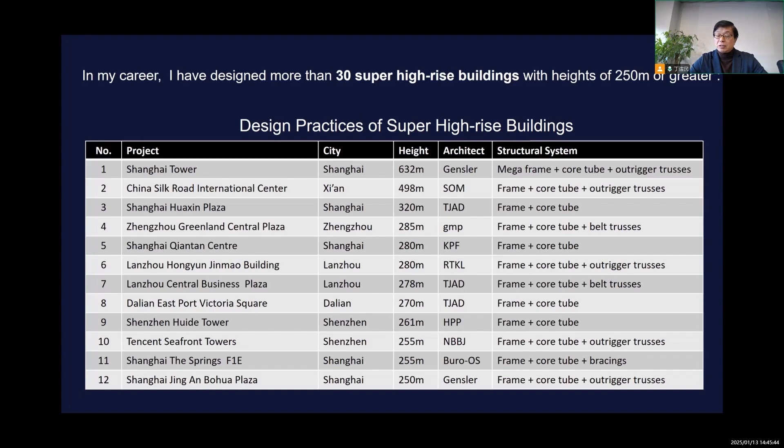Now I will introduce some building designs, first the practice in super high-rise building and large span building structures. This is a very famous building, now the highest building in China, Shanghai Tower. We got a lot of consultants together to work and design.

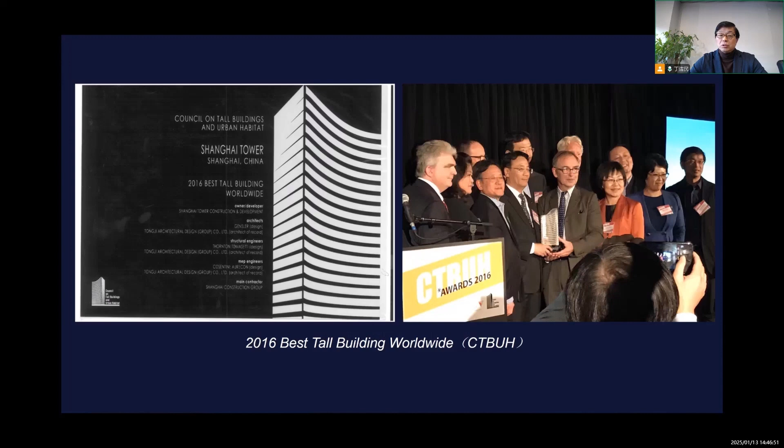The building got a lot of awards from abroad and in China. This picture shows the 2016 Best Tall Building Worldwide award which we received. Also in 2018, I got the Outstanding Structure Award from IABSE. This picture shows we got the 2019 Shanghai Science and Technology Progress Award, and the 2023 National Science and Technology Progress Award.

This is another super high-rise building located in Xi'an City. The height is near 500 meters. We worked together with SOM. This is a simple introduction to the structure system used for super high-rise buildings.

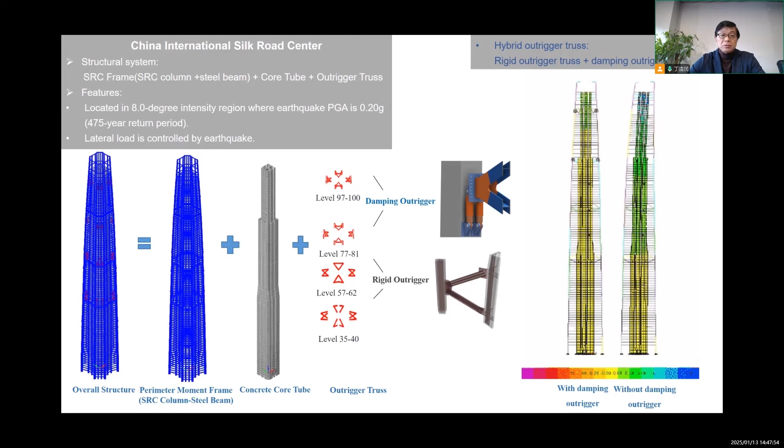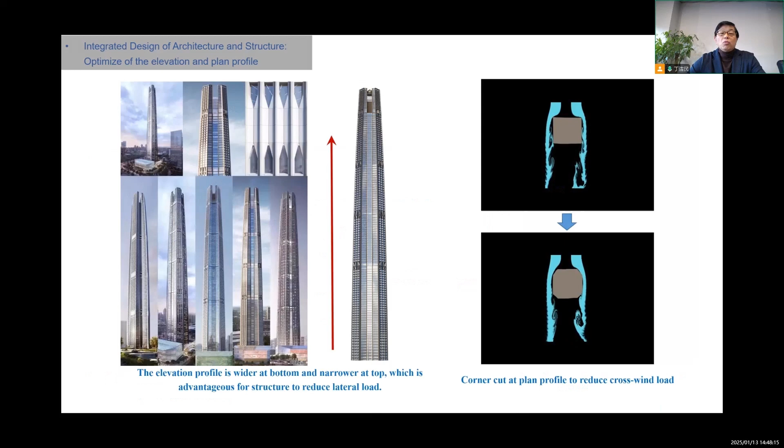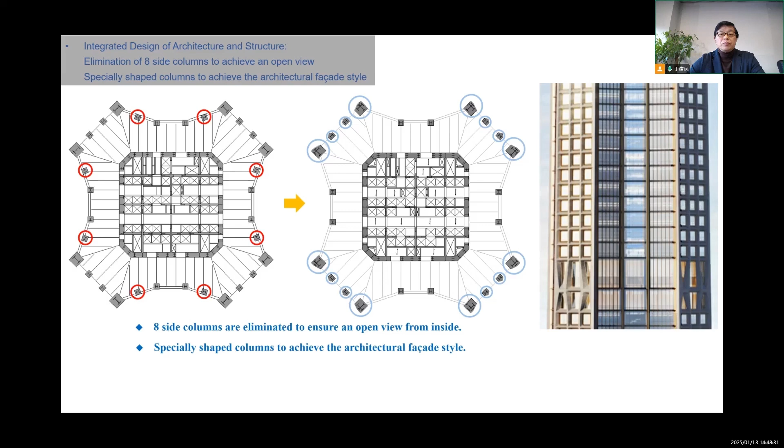This PPT shows the integrated design of architecture and structure, optimizing the elevation and plan profile. This optimization reduces wind load influence. This figure shows how we optimized to reduce the column numbers and make the structure design more easy and more beautiful.

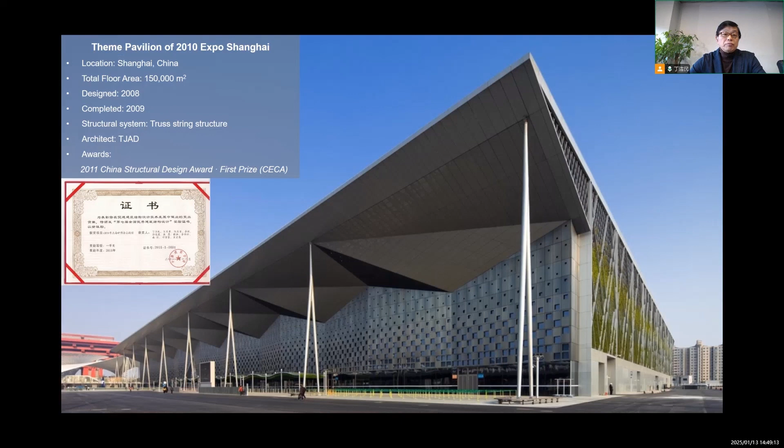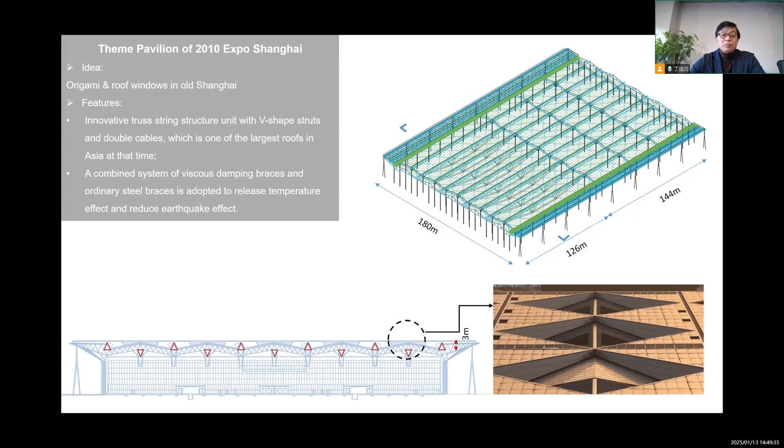This is a very interesting large span building located in Shanghai in 2009. This is the roof shape, and this is the structural system used for this building. At that time, this building had the largest span in Shanghai. This picture shows the interior of the building.

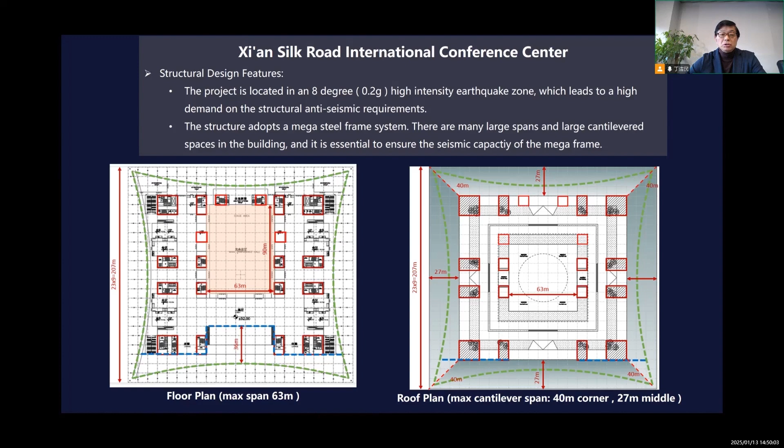Another building located in Xi'an City: this is the Silk Road International Conference Center. This picture briefly shows the roof plan in the building, in terms of architecture and structure.

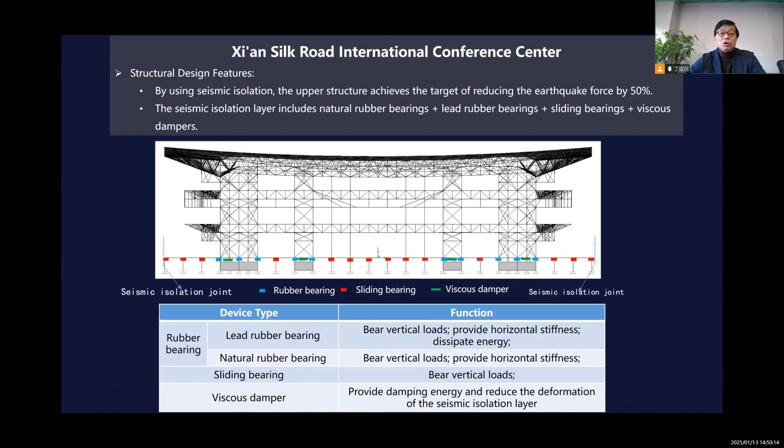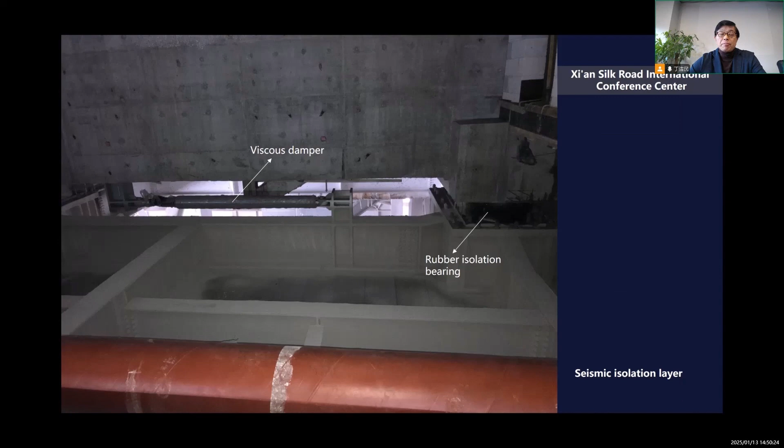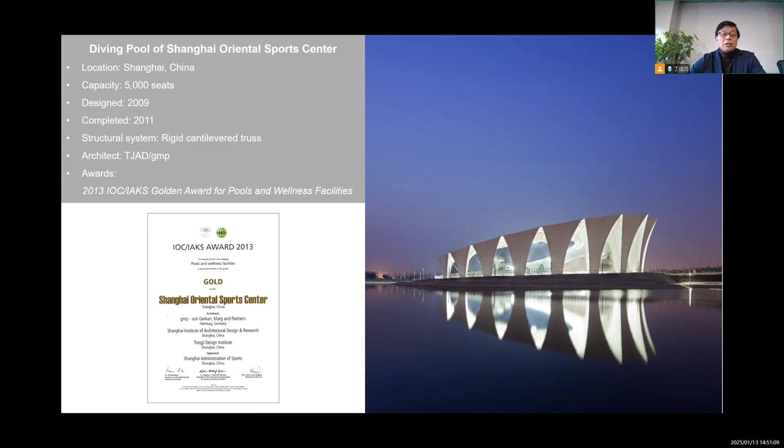This is a building located in Shanghai, the diving pool of the Shanghai Oriental Sports Center. We worked with GMP, the German architects. This building got a lot of honors and also looks very beautiful.

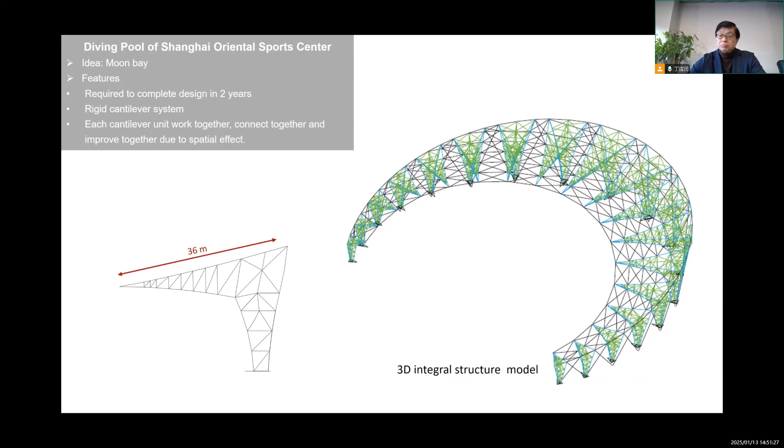This is the structure system shown and used for these buildings. After construction, we can see that the building looks very clear, very simple, and very comfortable for the architecture. This is another picture which looks very nice.

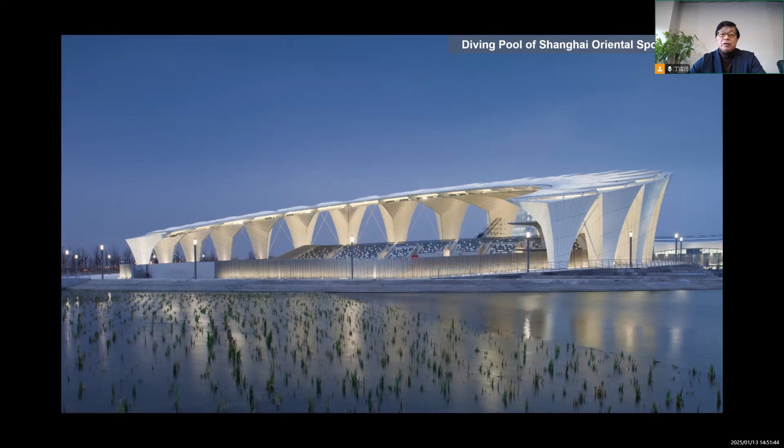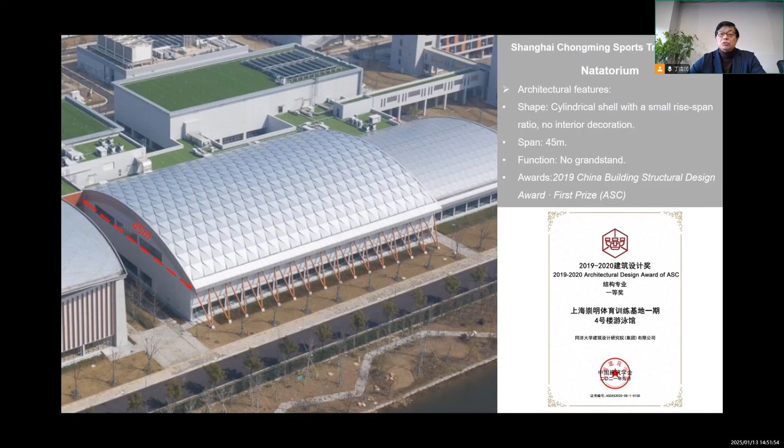This is also a sports building located in Shanghai, a swimming pool. It also got a lot of awards in China. This is the structure used for these buildings.

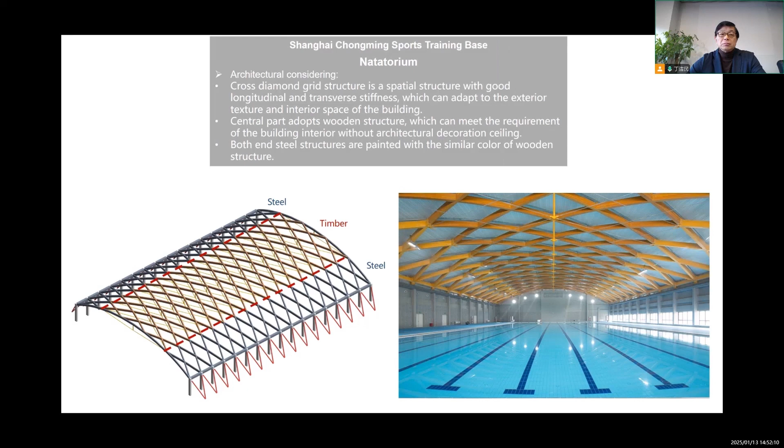Wood material was used for this building. These show some details of the roof structure, and some detail about the joint.

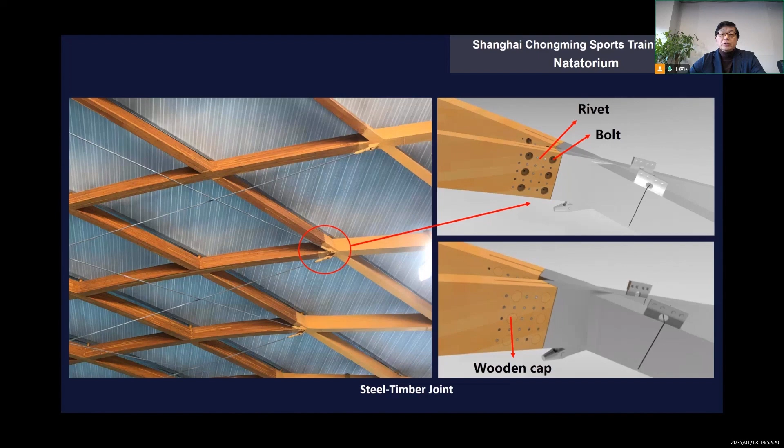After construction, we got some interior views of the buildings. This is another sports building for bicycle racing, and we can see that the building looks very nice.

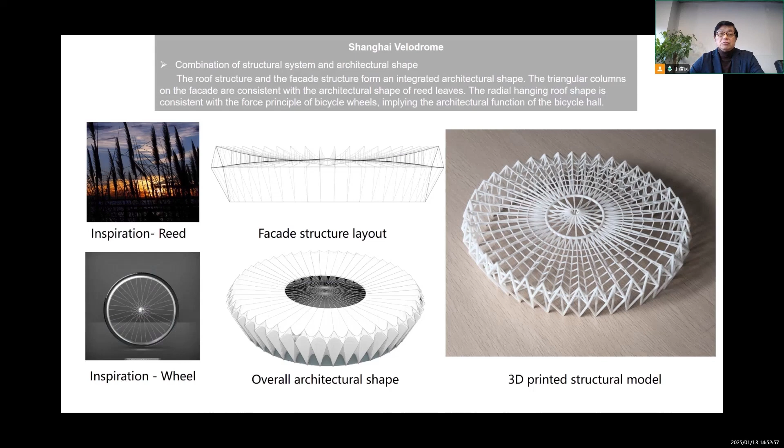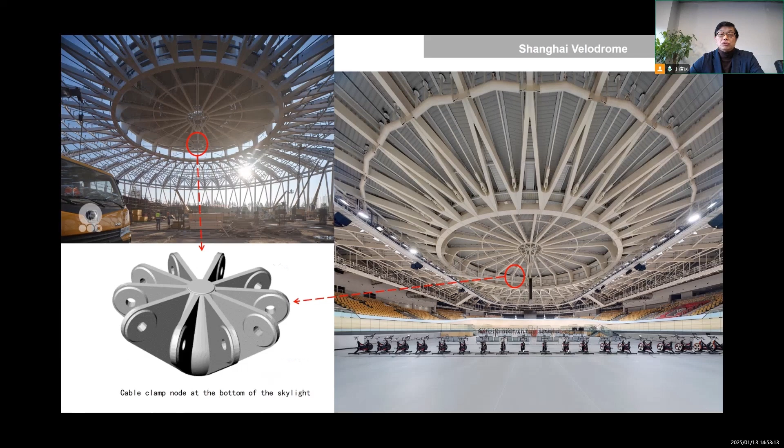This is a structure model, a 3D printed structure model, very comprehensive with the architecture. This building shows the structure construction. This roof picture shows after construction, and some detail. This is the elevation of the architecture.

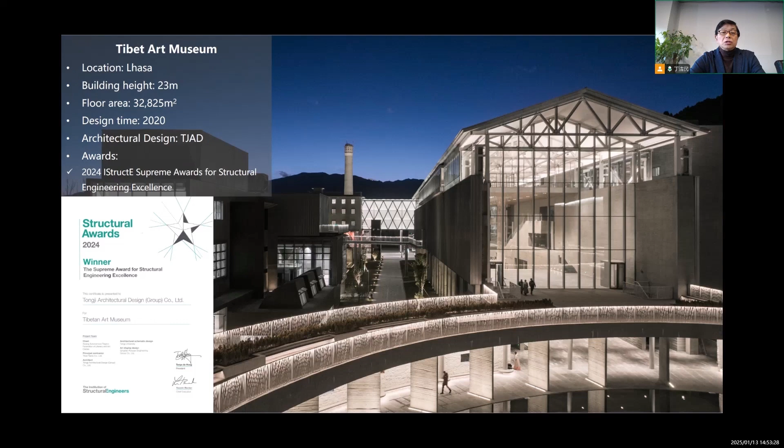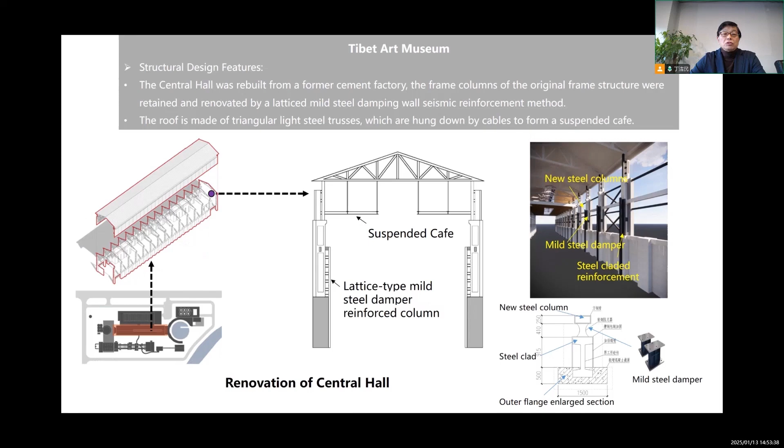Now we can introduce the Tibetan Art Museum. That project just got the structure award last year. This PPT shows some structure design features and some new technology used for this practice.

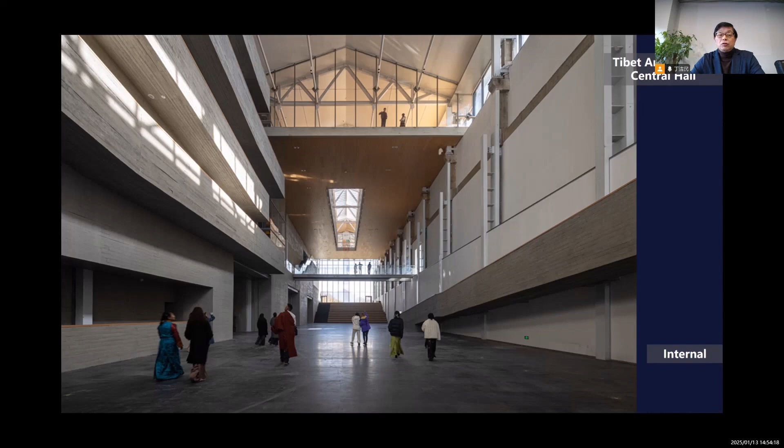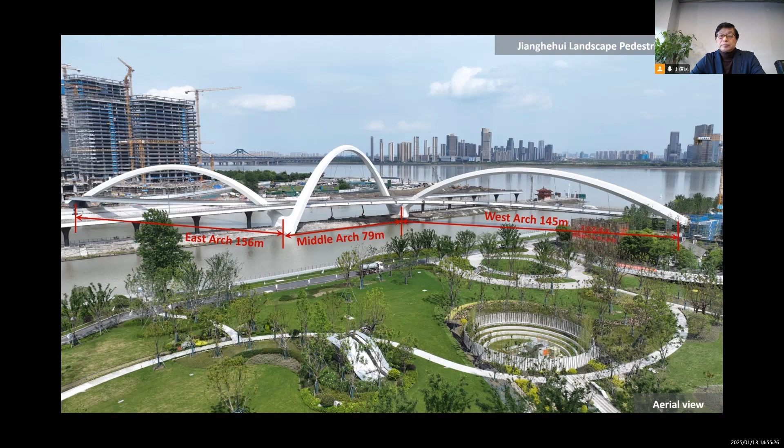This bridge was designed with the Zaha Hadid office. This is a bird's-eye view of the bridge, looking very clear, clean, and nice. This is the elevated view of the bridge.

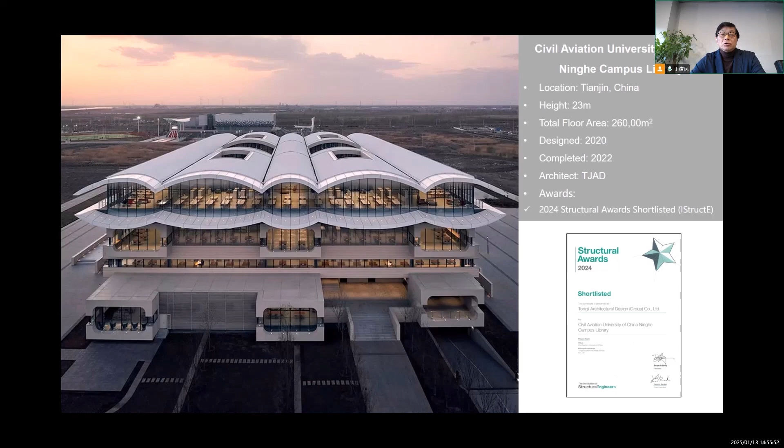And we see this project located in Tianjin city, north of China. This shows some structural system used for this project.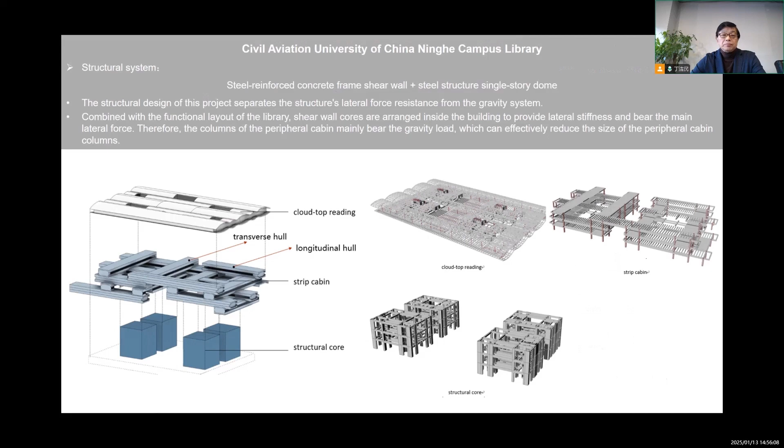We mainly focus on the roof structure design. They should be coordinated with the architecture view and the interior view.

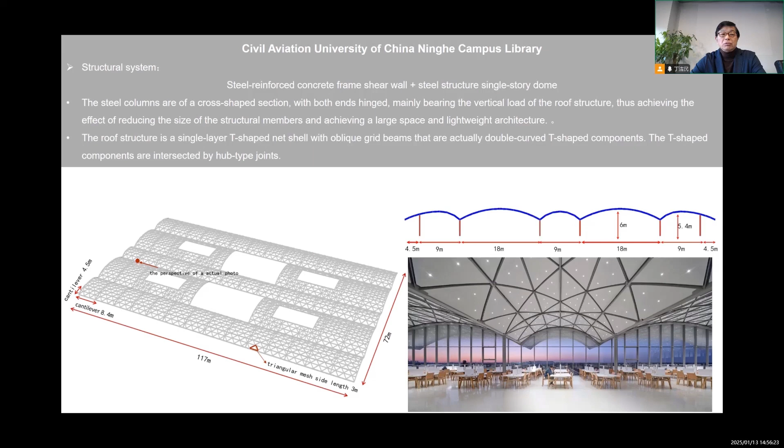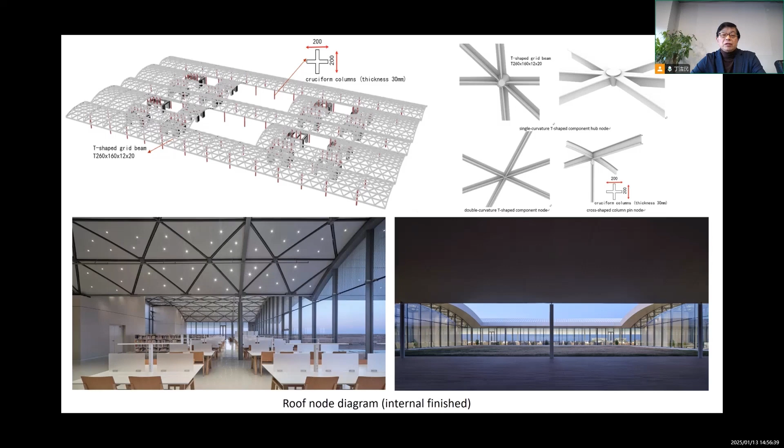This picture shows the after construction, the roof. The interior is very clean, very beautiful. This is a different view of this project.

And third part, I will introduce application of new technology. This is the very famous Shanghai Symphony Hall, designed in 2008, completed in 2012. This got a lot of awards in China.

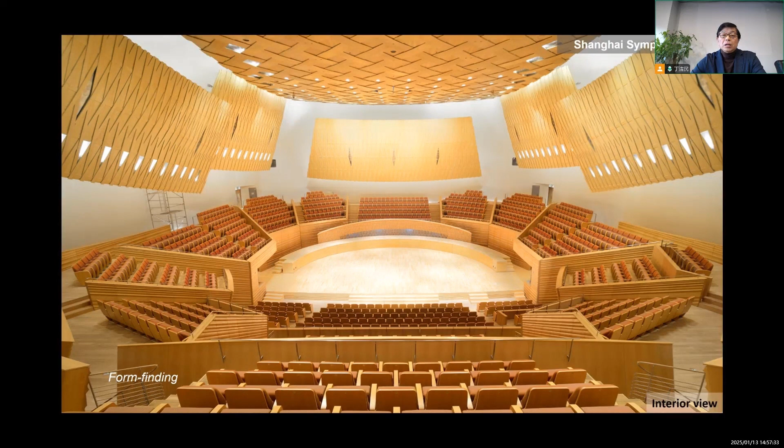That is a very simple introduction for myself. Thank you.

Thanks, Professor Ding, for that intro into your background and your projects. I'm really interested in general in an engineer's personal connection to projects. And so I wonder, the projects that you've shared with us are incredibly inspiring from a structural engineering perspective. And for me, they demonstrate beauty, creativity in engineering, but also confidence in the practice of engineering, as well as the breadth and depth of engineering application that I think for many of us is enviable.

I wonder, is there a project or projects that hold special significance for you? One that perhaps challenged you personally or made you reflect on the important work and responsibilities we have as structural engineers? Ms. Tanya, that is a good and difficult question to answer.

To become a qualified structural engineer, in my opinion, the following are essential. First, participation in the design of major engineering projects that allow you to apply structural engineering knowledge comprehensively.

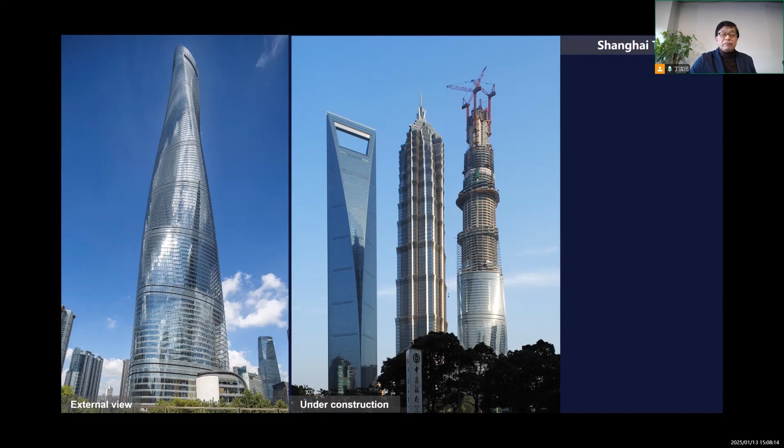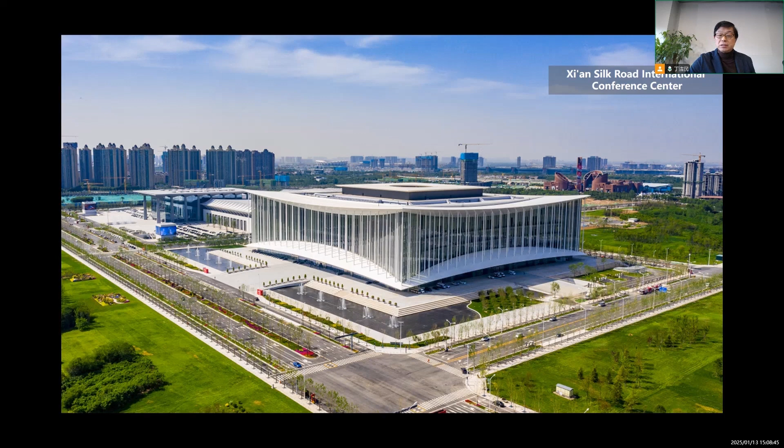From this, we can see the second point: we should create structure that can appropriately express architecture, aesthetics, and cultural characteristics. That means the structure design should let the architect be satisfied.

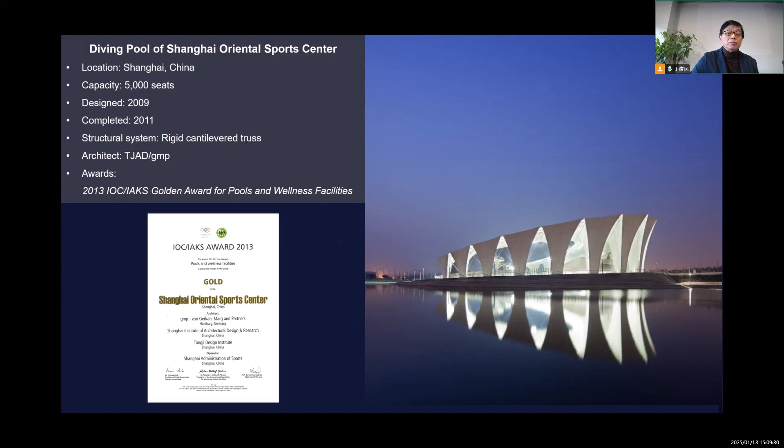You can see the diving pool of the Shanghai Oriental Sports Center, designed by gmp Architecture Office. This project got some awards worldwide. This view shows that the elevation of the building looks very nice. So we also should insist to let the structure system choice meet the architect's requirement.

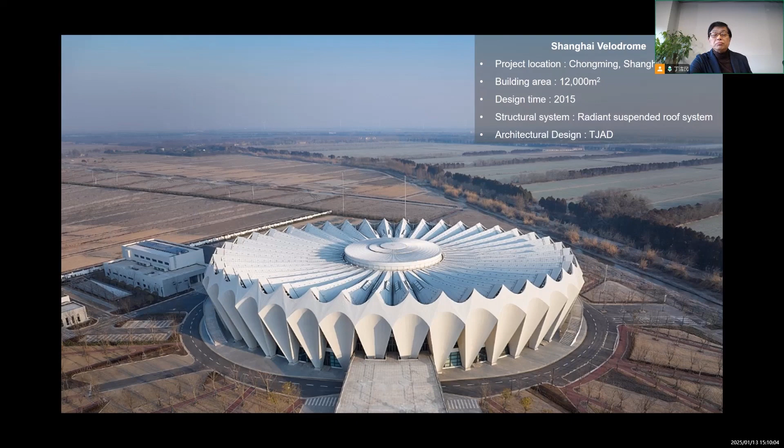And another sports center is also located in Shanghai. This is for bicycle racing. This is another elevation, looks very nice and beautiful, and also shows the local culture.

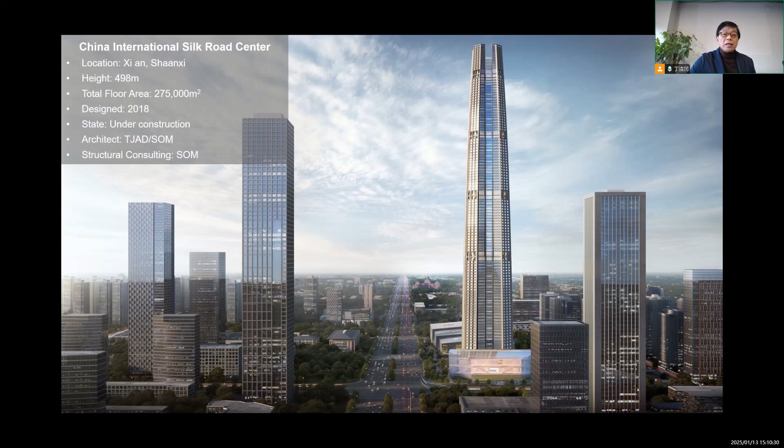From this point, we can get three points. Mastering advanced structural engineering technology tools and applying them in engineering design practice.

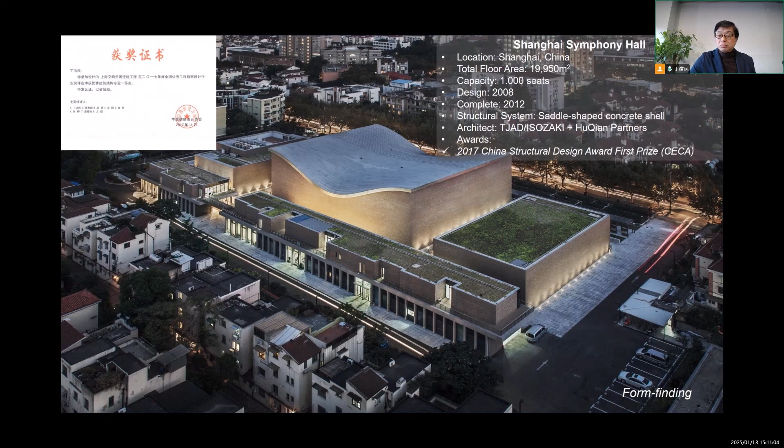This is Shanghai Symphony Hall. And from this PPT, we can see the optimization of the roof structure from the 2D structure system changed to the space structure system. We can see the original scheme in process, and the final scheme.

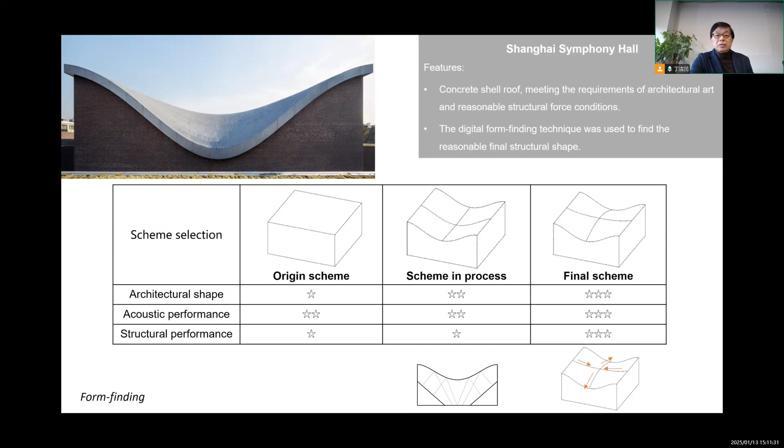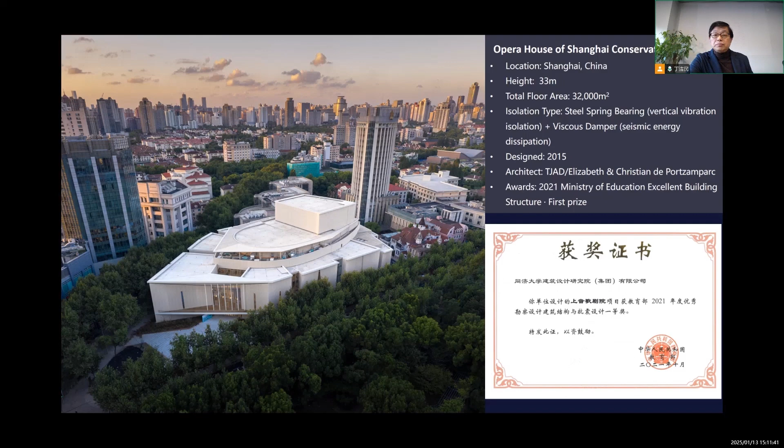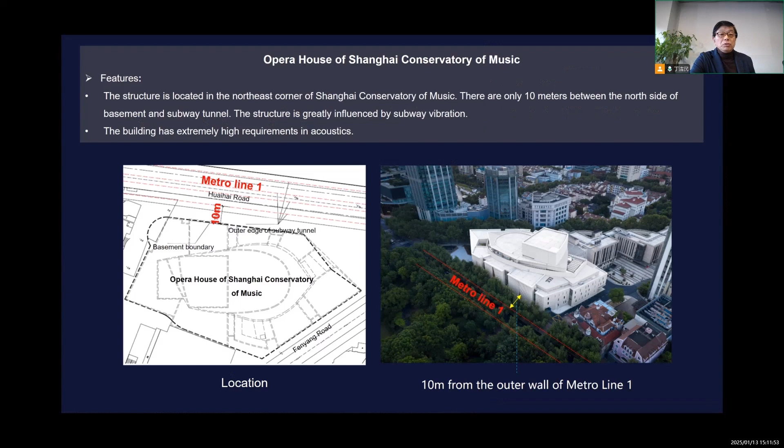And this is another project located in Shanghai. This is the Opera House. The opera house is located very near the subway, just about 10 meters. So the building also has extremely high requirements in acoustics. So isolation structure technology was used for this building to separate the noise caused by the subway.

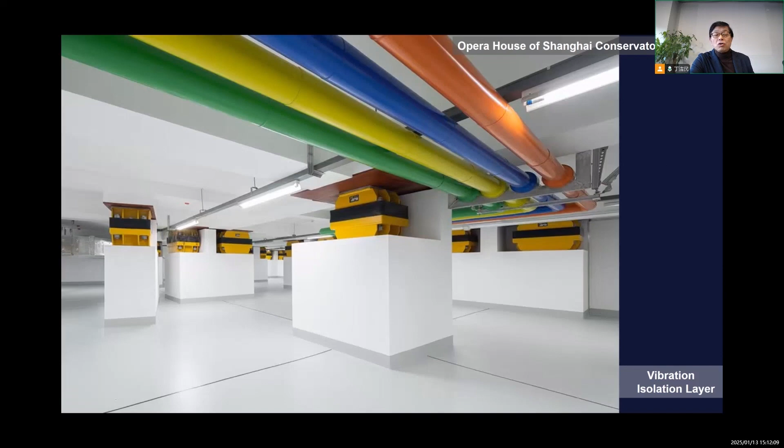To me, your work often appears to successfully balance beautiful forms with structural rigor, which is essential, but it's not always easy. How do you personally define the role between engineering, art, and architecture? Do you find that your work or understanding of engineering has been influenced by areas outside the field, such as art, nature, or philosophy, that might inspire your creative process? Or has it been more about pure engineering itself? I'd love to learn more about who you are and what inspires you, and how you bring that into your engineering practice and the buildings you've designed.

That is a very interesting question. In my opinion, the relationship between aesthetics and mechanics in the East can be expressed through yin and yang, a traditional pattern with only two colors, white and black. They let architecture and structure work together, but they are also independent.

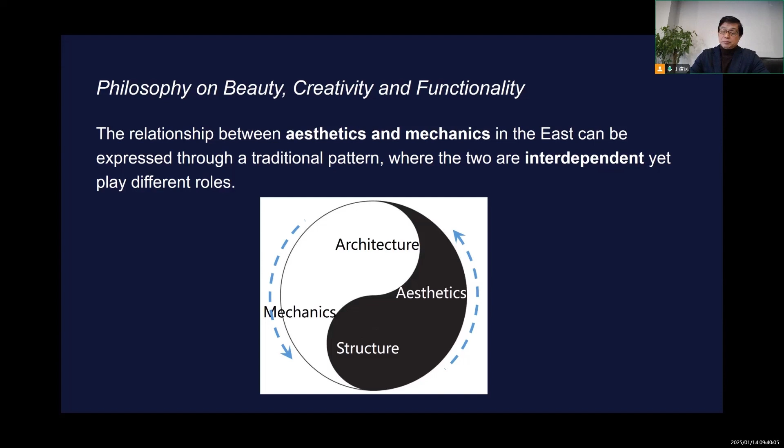So in this pattern, the two are interdependent yet play different roles. I think pedestrian bridge design can easily show the relationship between architecture and structure. I'll take some examples of pedestrian bridge design. First is a bridge located in Shenzhen City. The span is more than 170 meters. This is a structure layout showing the land and site situation, and the main structure size.

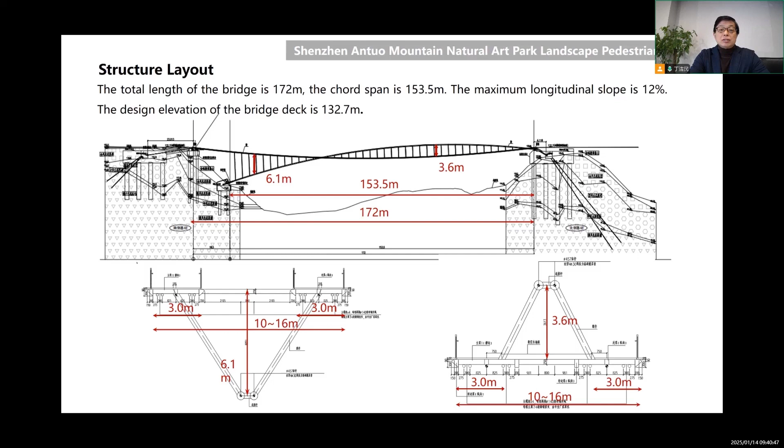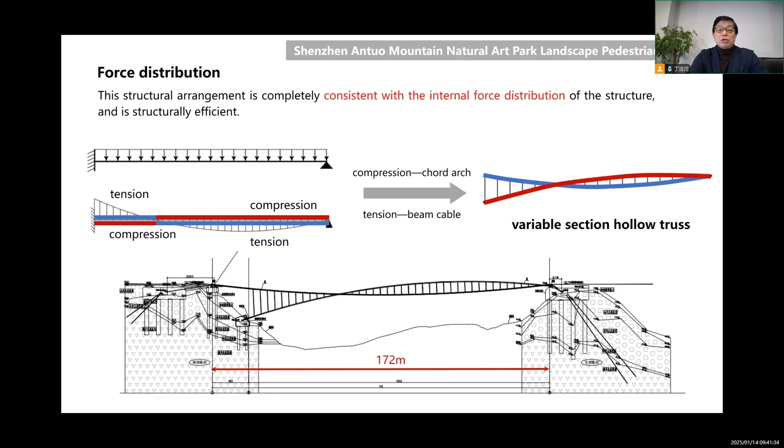This bridge is just under construction, so after construction, the pedestrian bridge should look very nice and coordinated. Now we can see another bridge located in Hangzhou City.

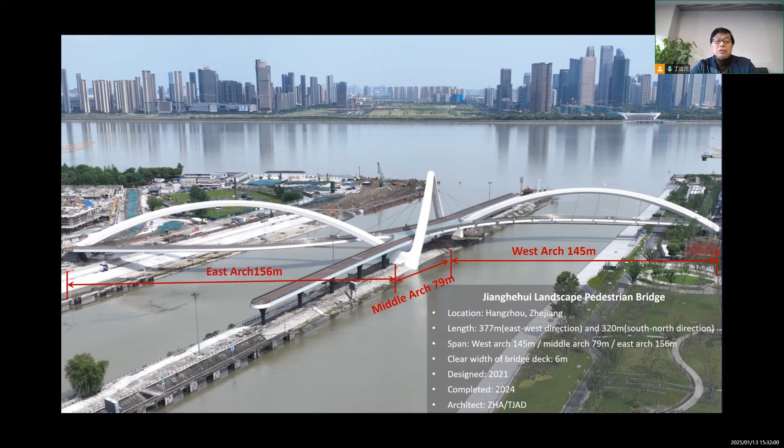The length is about 377 meters. This architecture was designed by Zaha Hadid, the structure designed by Tongji University. This is a very brief, simple structure system shown in the figures: floating, single-side suspending, and a spatial special-shaped tied arch bridge. It also has some structural characteristics.

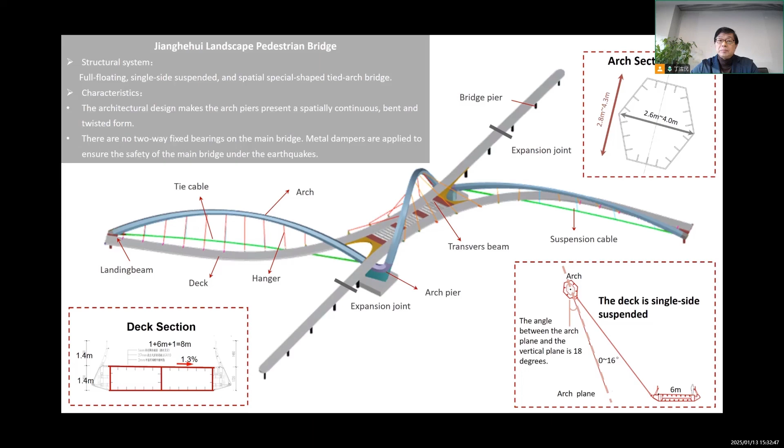The architecture design makes the arch pier present a space continuous, bent, and twisted form. We can see some structure member sections, cable arrangements, and others. After construction, we can see the bridge is very beautiful and has some romantic quality.

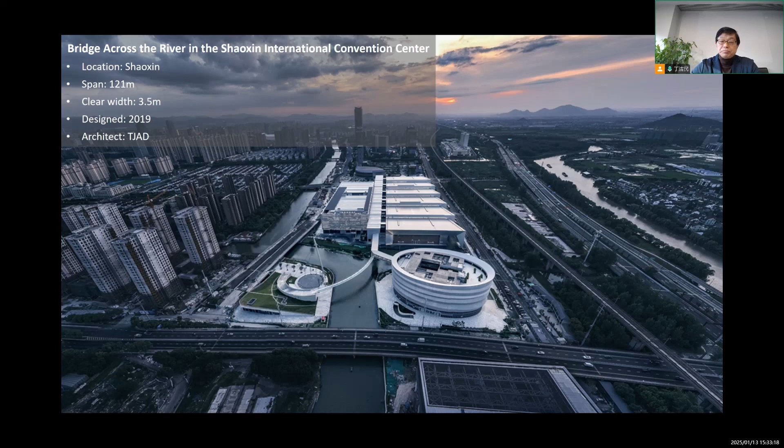Finally, I'll introduce another bridge across the river at the Shaoxing International Convention Center. The span is about 120 meters. Architecture and structure design were also done by us. A truss cable hybrid structure system was used for this bridge, which looks very simple and beautiful.

After construction, we can see the bridge is very beautiful and looks very nice, especially in the night view.

Personally, I'm really interested in the human aspects of the engineer and of engineering. As part of that, I'm really interested in the role of intuition in engineering. How important do you think intuition and critical thinking skills are today in our practice, where we're seeing a lot more digital tools, excitement around artificial intelligence and other tools to speed up our work, much more common than decades ago? Do you think intuition plays a stronger part, or do you think that can be replaced by new tools as we look to the future of engineering practice?

I think a structural engineer should have a profound and systematic understanding of various material behaviors and structure systems, and how to use them. On this base, the intuition developed from engineering experience can greatly help us improve design quality. Secondly, structural computer analysis can help us verify the correctness of the structure design result, but it cannot fully replace human thinking and analysis. Of course, as artificial intelligence progresses, some routine work in structure design should be replaced by artificial tools.

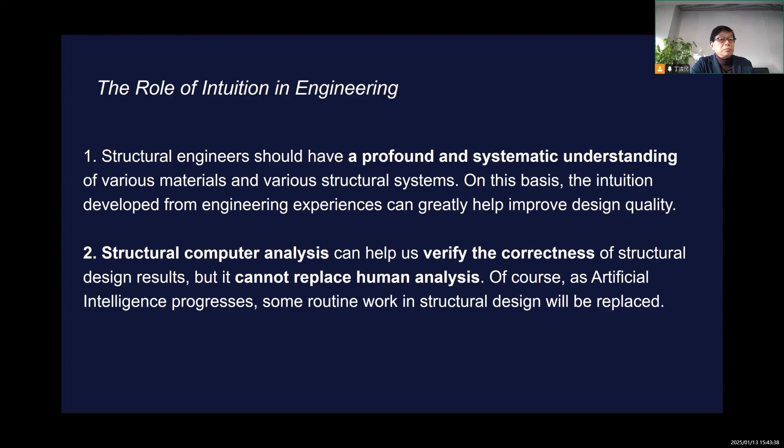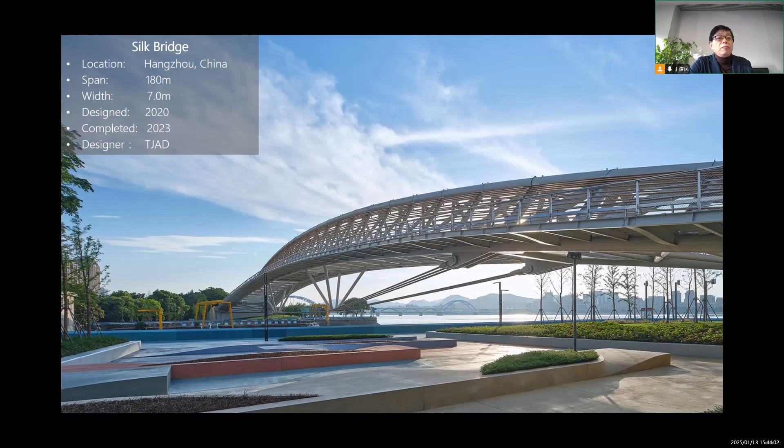For example, the Silk Bridge located in Hangzhou City has a span of about 180 meters. The width is normally 7 meters. For a pedestrian bridge, the width is normally from 4 to 6 meters - this one is 7 meters.

At first, we showed scheme 1 as a structure system for this bridge. After structure analysis and considering some experience, we got scheme 2. Finally, we got scheme 3, the structure system used for this bridge.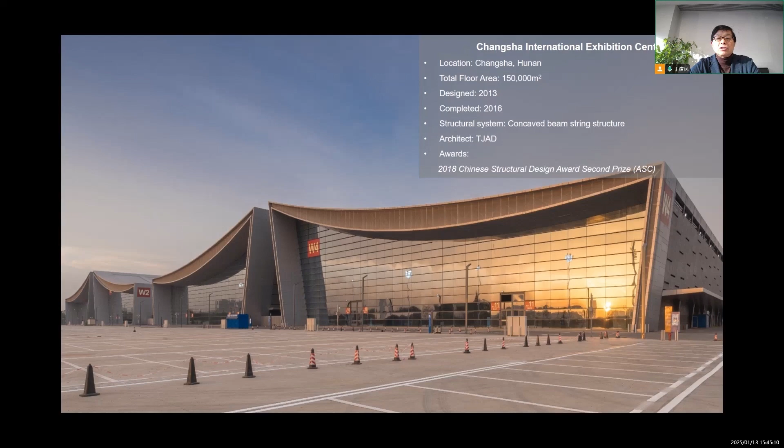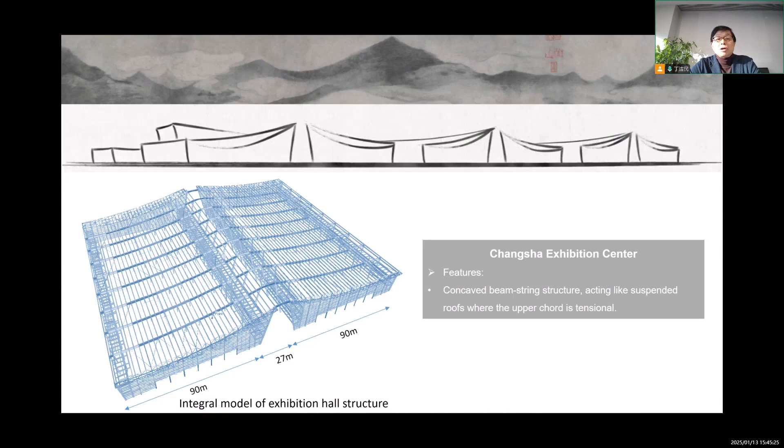Another example located in Changsha, Hunan province of China. The architects required a roof shaped like this, which is not beneficial for a large span structure. According to the normal structure system and the behavior of the structure under vertical and lateral load, and according to the structure analysis result, finally we chose a very special structure system for this building, which can satisfy the requirement of the architecture mind, and also the interior space can satisfy the use of the building.

I don't think we could have a conversation at the moment without addressing sustainability and the impact of climate change on the built environment. With climate change impacting the built environment globally, and environmental sustainability becoming a major consideration in structural engineering in many parts of the world, especially delving into embodied carbon and reducing that, what changes are you seeing in the way it impacts your work and your region? Do you think it has the potential to increase innovation and creativity in structural engineering, or is it really hindering it as we look to reduce embodied carbon and negative impacts on the environment through our work?

I think climate change is a shaky thing. We cannot stop it, but we can delay it. More than ever, we are focused on eco-friendly design and sustainable materials. That means, as much as possible, we use structural materials that can be green and recycled. As structural engineers, we are designing buildings or bridges that not only satisfy safety, but also satisfy sustainability.

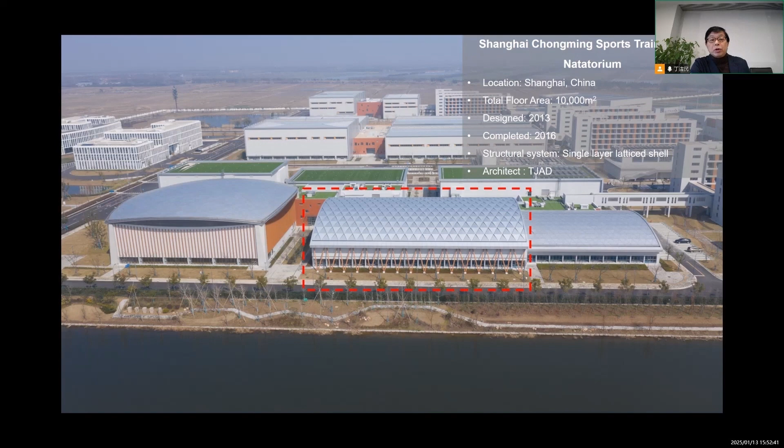For example, this is a swimming pool building located in Shanghai. During the design, we compared different materials. Finally, we used wood and steel material to form the roof structure. This picture shows the use of different materials on this project. This shows the structure feature, the timber structure combined with steel. Where the middle span bending moment is small, we adopted wood structure, and where the end span bending moment is large, we adopted steel structure. Crossing cables are used to improve the stability.

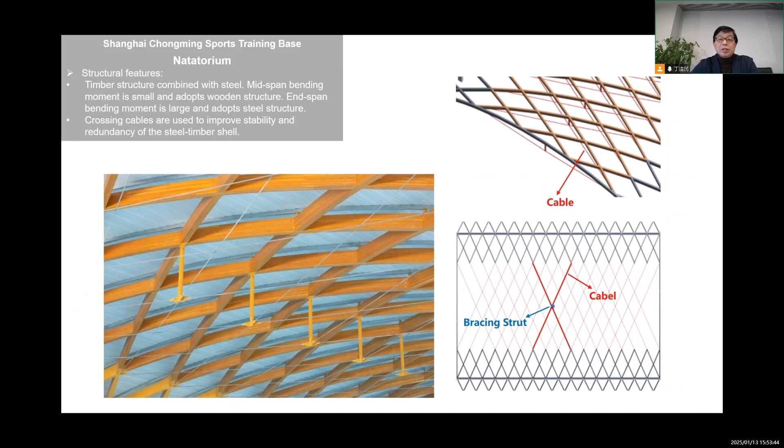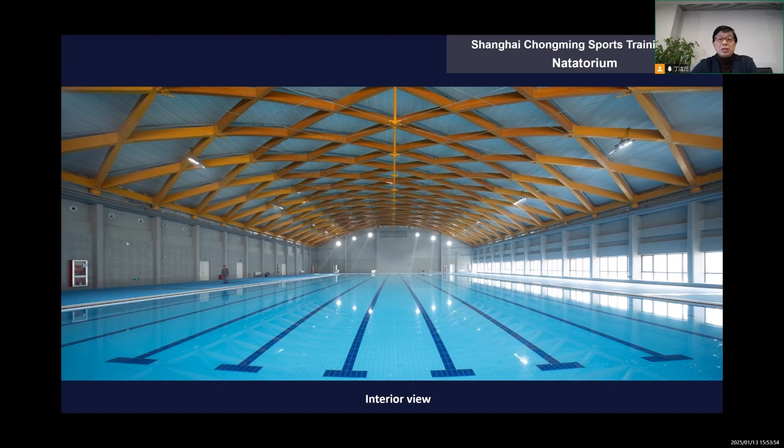I just showed some detail. After construction, this shows the interior view. It's very good and can meet the use of the interior.

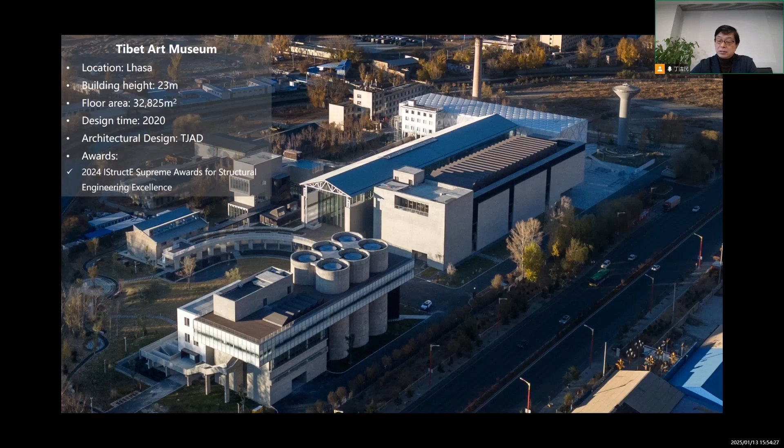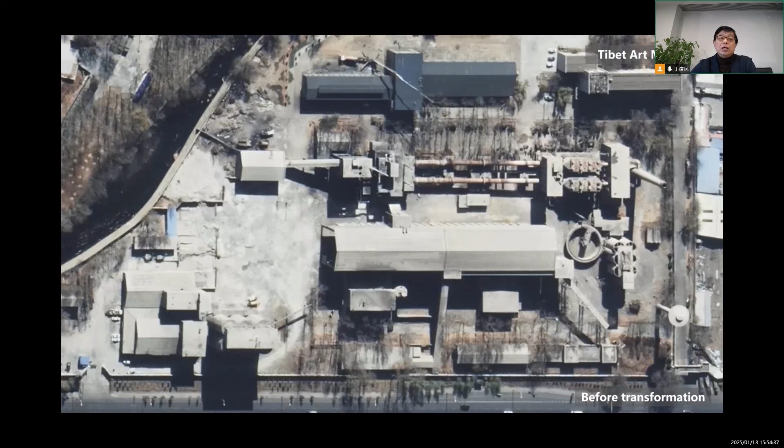Another building just finished last year is the Tibetan Art Museum, located in Lhasa, Xizang. That project is very lucky — it got last year's IStructE Supreme Award for structural engineering excellence. Before the transformation, the picture shows it was very old; this was a cement factory built in 1960. This view picture shows it after transformation.

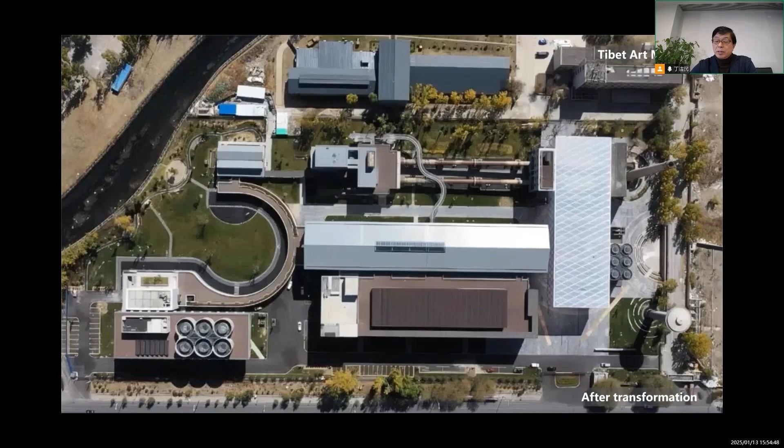One of the reasons I was really excited to have this conversation, Professor Ding, is that you bring a unique perspective as a gold medalist because of your work in the East, in comparison to many of our gold medalists from the West. I'm really interested in what insights we can learn because you can bring both perspectives to the practice of structural engineering. Many of your projects are internationally award-winning and recognized on a global scale. You've also been involved and celebrated extensively both in China and abroad, such as IStructE Gold Medalist and a CTBUH Fellow. So through your involvement in both structural engineering in the East and West, what unique perspective or insight can you give us? For example, perhaps there are different or unique approaches to education, training, knowledge, or experience that our audience might find interesting or inspiring.

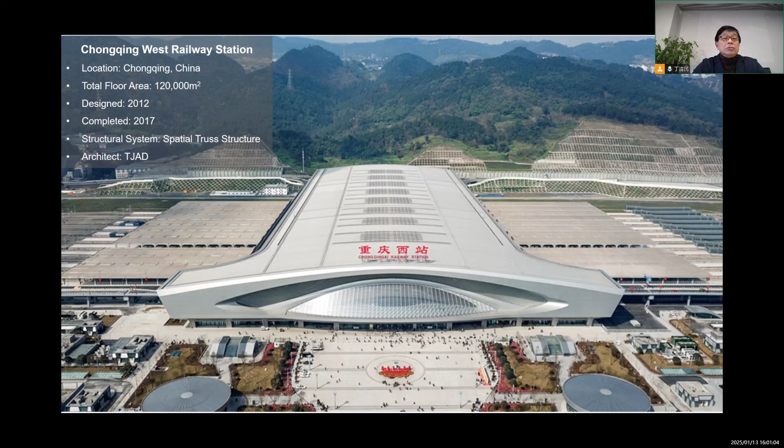We take some examples designed by us, the Chongqing railway station, which also received some awards.

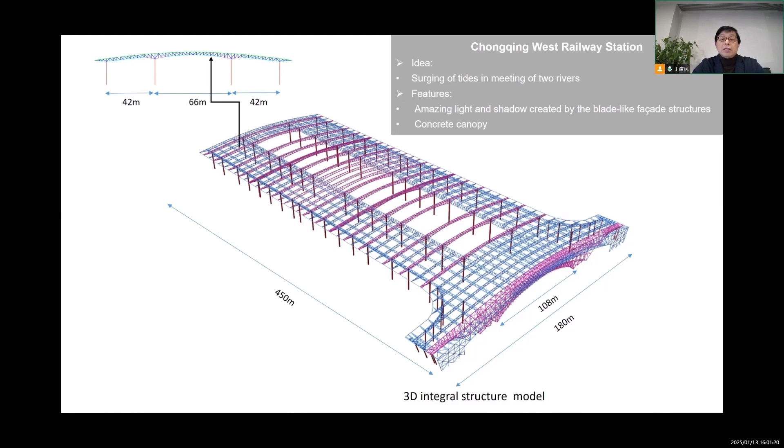We chose a structure system that is very simple and can match the architecture design. It looks very unusual, and the structure system is very reasonable. After construction, we can see the interior view and the interior space can satisfy the use of the architecture.

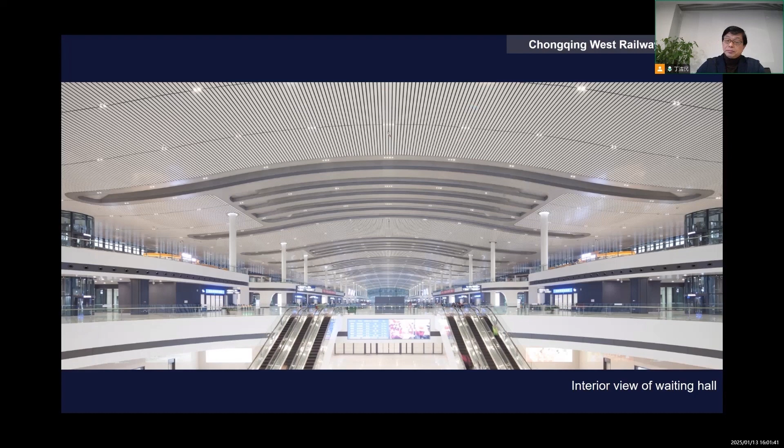It also combines with the facade design of the architecture. We compared different structure systems, and finally chose the arch structure. The length is more than 100 meters.

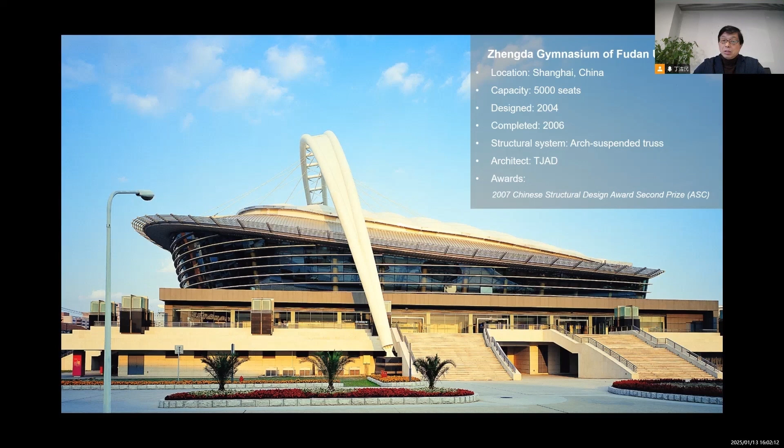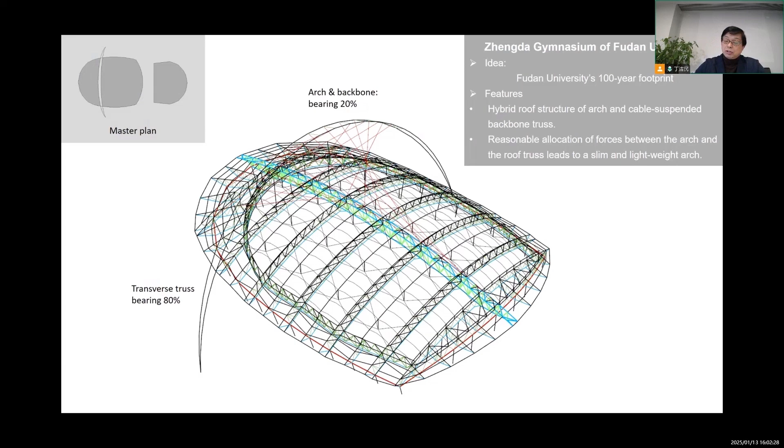A second example is the gymnasium located in Shanghai, Fudan University. We considered the architectural requirements and chose a very suitable structure system, combining the arch structure with a roof structure.

I think this is a good question, and it's difficult to answer. I'm sure there's no uniform answer. In my opinion, the emergence and evolution of AI technology will bring profound change to the field of structural engineering. But this change will gradually allow us to learn and adapt to it step by step. Everyone knows the building industry is one of the earliest industries that has been with human civilization, yesterday and today, and I'm sure it will continue to follow us into the future of human civilization.